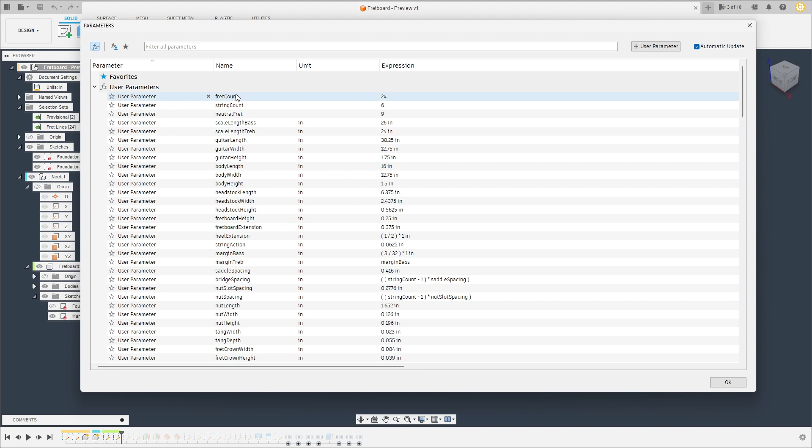The more you get into a heavily driven parametric model, the more parameters you have. And if you don't necessarily have the best convention starting out, it can get a little sloppy along the way. So, real quick, currently I use what's called camel casing, which is a lowercase letter at the beginning, and then every word that's concatenated with that has an uppercase letter. So, if this were right here, you got lowercase, uppercase, and then we have fractions, we have decimals.

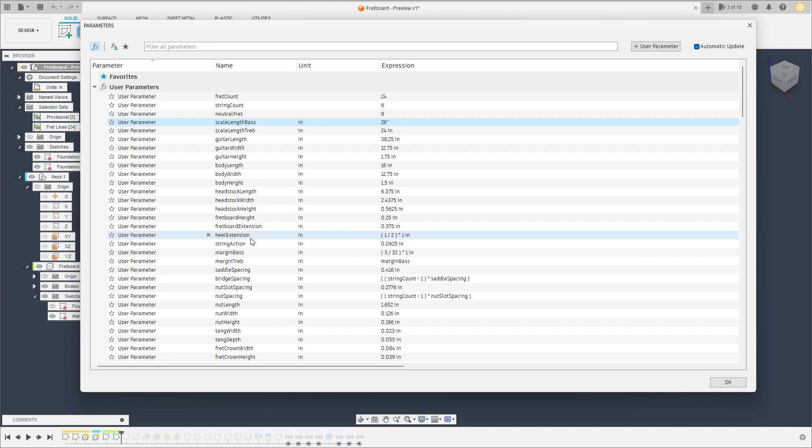Here we have some unnecessary exterior parentheses, as well as if we were to use double quotes instead of having inch there, you can see, there's just some inconsistency errors. And then here, if you decide later on, oh, maybe I don't really like camel casing, going through here and renaming everything one by one can be kind of tedious. And if you haven't been adhering to a naming convention, then this can get real sloppy.

So the first script I'm going to go through is called PrettyParameters Tidy. What this is going to do is rename all your parameter names to make them more consistent and adhere them all to a single naming convention. And then it will go through and remove any double quotes, any symbols from your measurements, as well as remove any unnecessary exterior parentheses.

The logic for trying to find any unnecessary parentheses is going to be a lot more difficult, and that might not be something I try to dabble into, because that could really end up ruining a lot of people's equations if it's done wrong. And then it's going to have the option if you want to convert those fractions to decimals. Some people like working with both, so it's just an option.

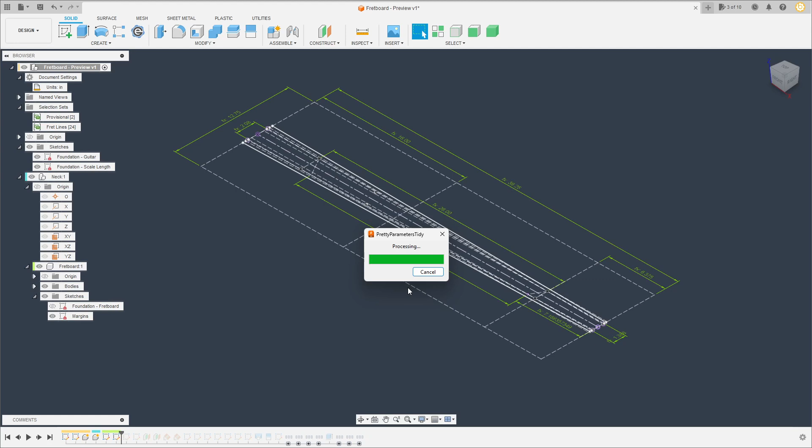So I'm going to run this, and as you see, it's processing. Currently, it's going through and renaming all your names. And then it's going to prompt me if I want to do a conversion to decimal or not. Convert user fraction expressions to decimal. Sure, why not? And then parameter expressions converted to decimal. This is just a little bug I got to fix because that won't close. Okay, now let's go back to our parameters.

And you see here that this has been unified to match everything else. Your fractions are now gone. And your exterior parentheses are now gone, as well as everything's been converted to what's called Pascal case, which is capital and capital. Previously, we were using camel case, which was lowercase and capital.

So I do intend to have the option where you can choose which casing you want to go toward, if you like to use snake casing, upper snake casing. There aren't too many options Fusion parameters will accept. You can't put hyphens in there, so you can't do train casing or anything like that. So it's basically going to be Pascal, camel, and some snake casings.

All right, so the next one I want to show you: if you've worked heavily with parameters before, you realize once you create a parameter, you can't change the unit. You can change the name, you can change the expression, which then drives the value. But this is pretty much set in stone.

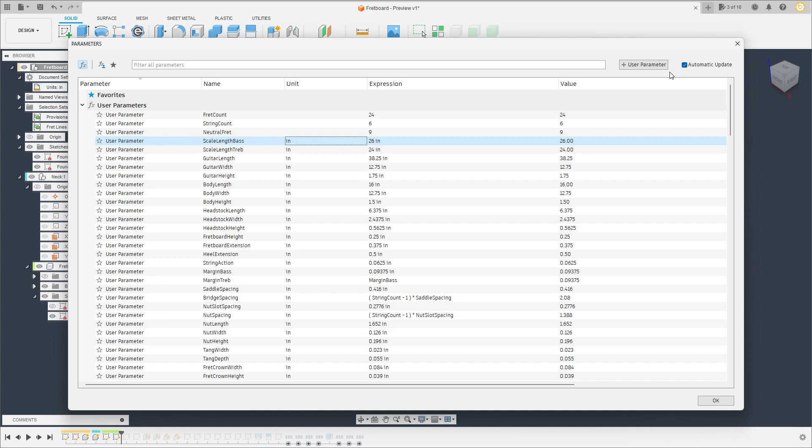So the other part of the script is going to convert all your units to metric. Currently, it only does inch to millimeter and millimeter to inch. Later on, I'm going to try to add the ability to use a target, so if you're working in microns but want to convert to nautical miles, you can do that. Let's go through and see. As well as with the conversion earlier, it leaves any expression with a parameter in it alone.

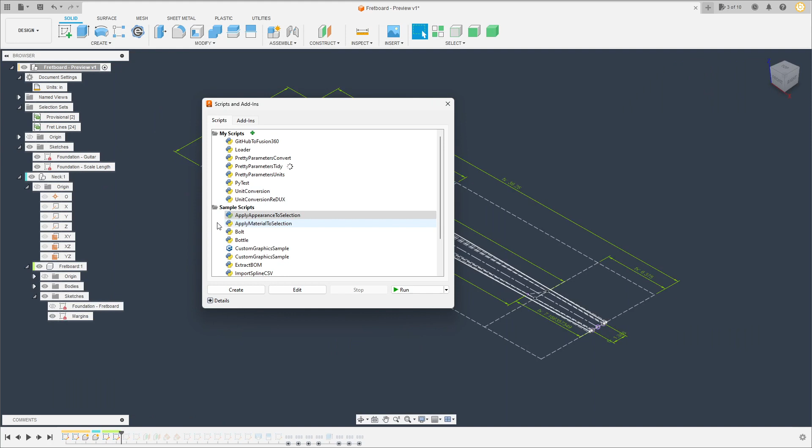So here we have the PrettyParameters Convert module. It says my units, current units are inches, click OK to switch to millimeters. This is going to take a bit, depending on how extensive your scene is.

I have a lot of parameters. What this does is it jumps to the end of your timeline so it can access all the parameters in your scene. Right now this is just a graphical error with the API, so we're here, but it still shows us here. So it went through.

What it's doing behind the scenes is storing all your original parameters into a dictionary, then creating a copy, renaming your original parameters with a temporary prefix, and then it reconnects all your expressions to your new parameters. It goes back and deletes all your old parameters. So it's several stages, and it takes a couple moments.

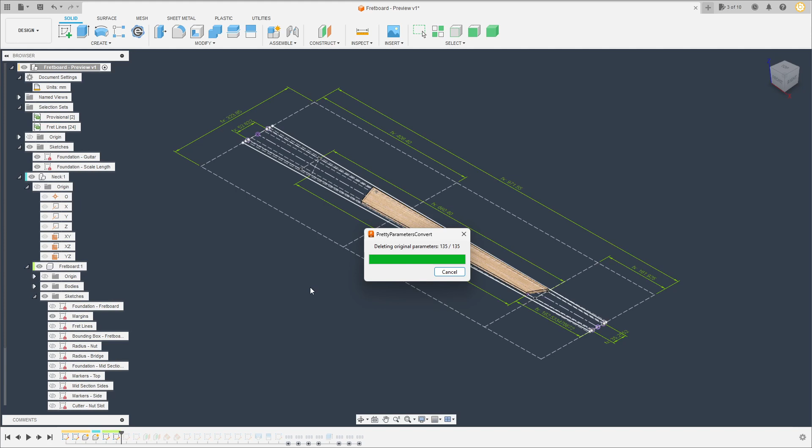It's not perfect. I'll show you some current issues. Now it's computing because it jumps to the end. It suppresses all your timeline groups, so if you're not working with timeline groups and just have a whole string of features, this could take even longer. That's something I hope to improve later on.

So if we see here, now all my measurements are in millimeter. So we go here and everything is in millimeter.

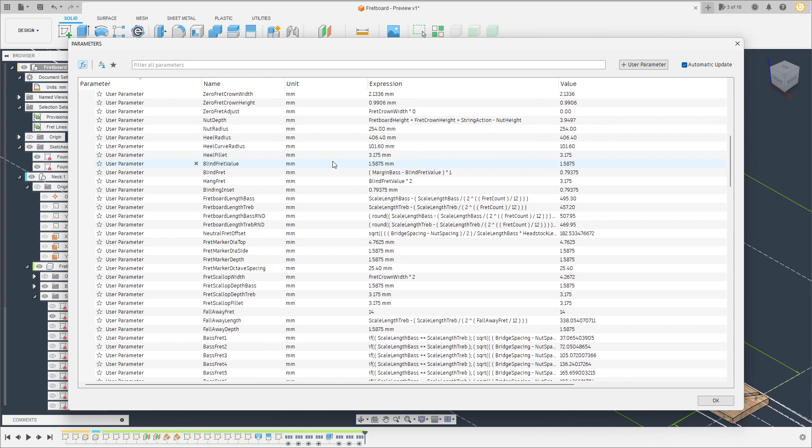For the user expressions, if we go down to the model expressions, which are your design slash all expressions, I haven't gone through and added the logic for converting these to millimeter either. So if we go down, here we have an imperial fraction, and here we have an imperial float. So there's still some work.

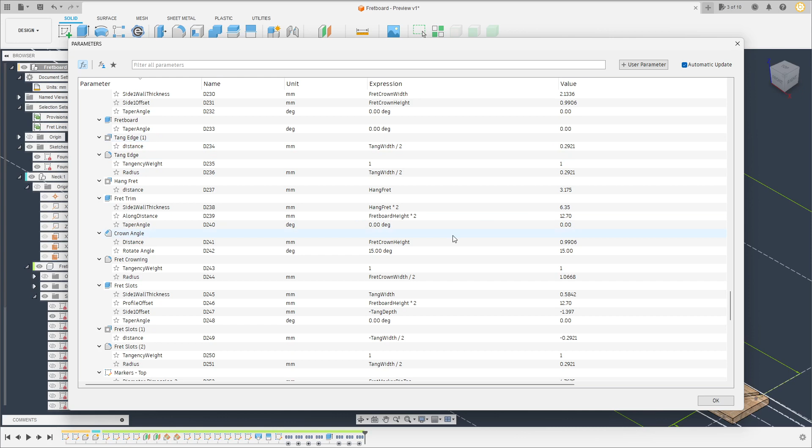Some of the logic is what makes this difficult, especially for unit conversion. If I say every number that's an expression should convert, well then you have, this is going to be tang width divided by, instead of just being a unitless value, it's going to see that as 2 millimeters, and that's going to give you a different value. So the logic for that has to be a little bit more figured out.

But so far it works. For simple files, it works just fine.

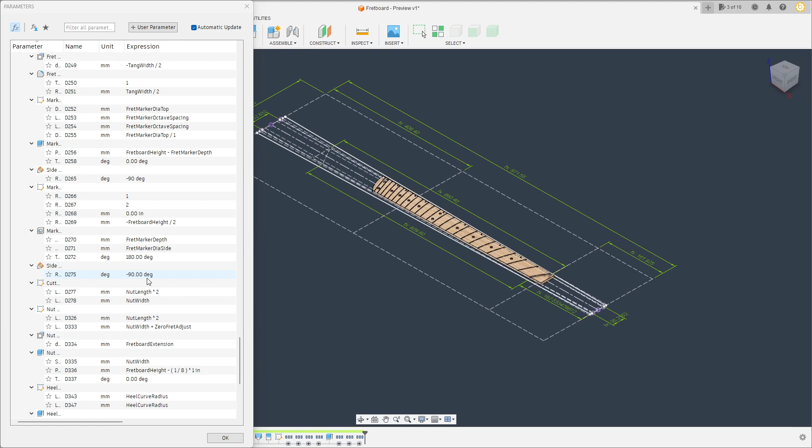I hope to package this up here this weekend so people can try to use it, for different use case scenarios and debugging. I only have my files to work with, and my files are pretty centralized over my type of workflow. So letting other people use it to see what kind of errors and logic failures they can run into would be really beneficial to hopefully improve this down the line.

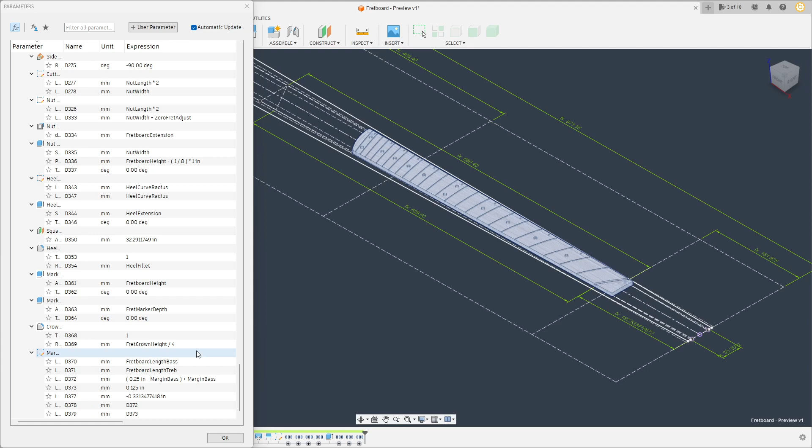Again, it's nothing super substantial, but I think being able to convert the units will hopefully help a lot of people out. So let me know if there's anything you didn't like, anything you did like, anything you think I could add, especially for the first module, which is the tidying stuff up and the PrettyParameters. I think that would be really cool to make this more robust and more beneficial to the community. So thanks again, let me know.